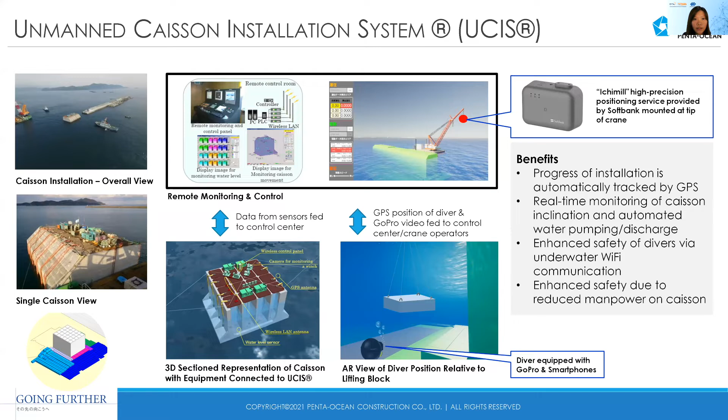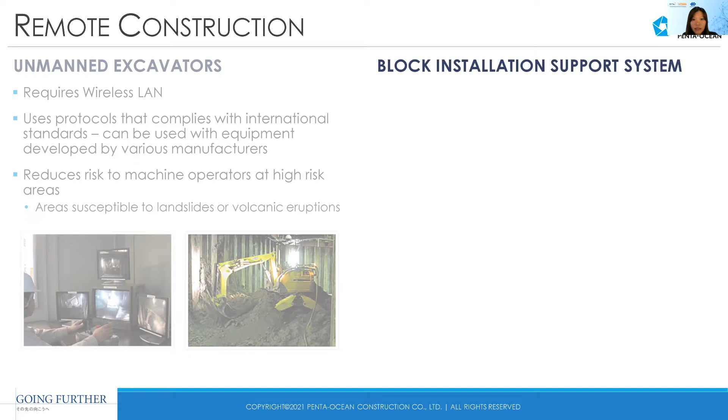Another technology that's related to remote construction or assisted construction is a block installation support system that we are using to install these X blocks for wave protection. So this system is made up of a dedicated frame, and there are various equipment mounted onto the frame, like the 4D sonar and some GNSS systems. And when these blocks are lifted underwater, this is a 4D sonar image that you see, together with a 3D modeling software that was used to model the 3D blocks.

The software will help to superimpose the actual 4D sonar image together with the 3D models that we have, and then predict or help the operators to identify the target installation position to place the X blocks. So what this does is that it helps us to reduce the time divers need to spend underwater to assist the crane operators to identify the target installation positions.

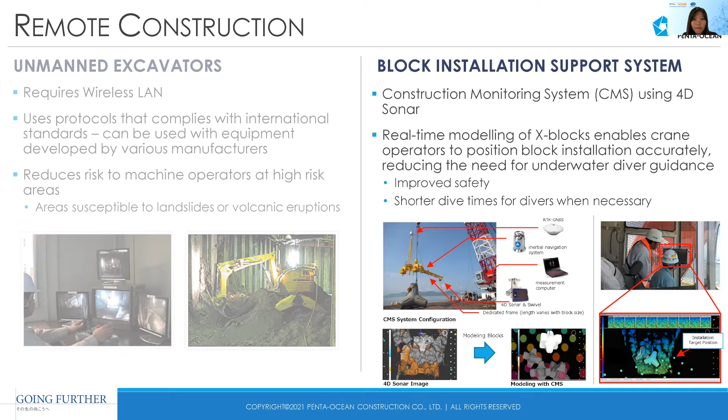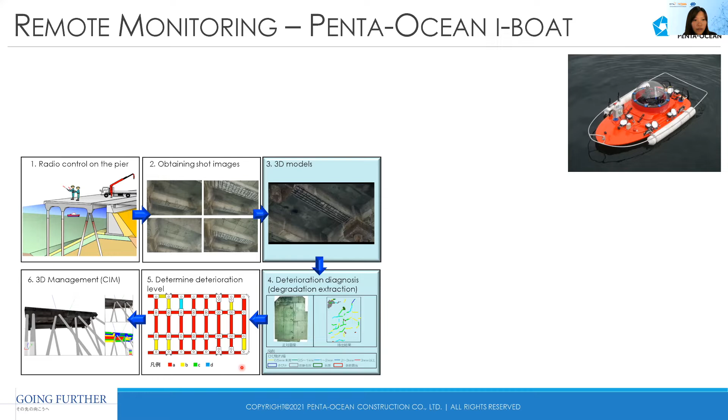So then based on these crack widths that it identifies, it automatically determines the deterioration level of each of these structures and gives a sample report like the one you see here that is colored. So this helps building assets or civil infrastructure assets people understand what is the current structure degradation of their structures.

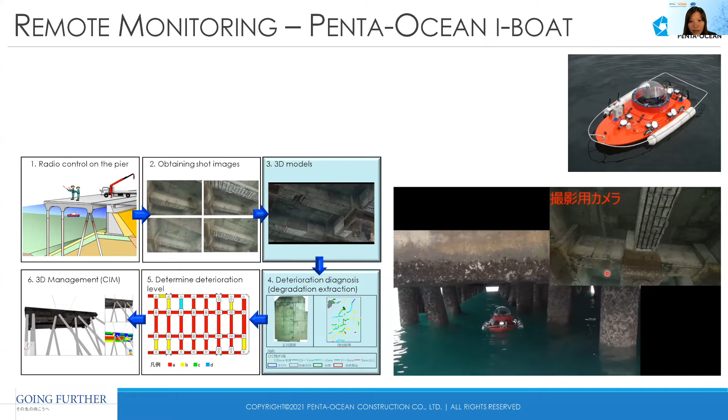So this video here, it's a boat in operation. This is the boat that is moving, remote controlled by somebody who's standing on the pier. And this is the video that the controllers are seeing. And you can clearly see how badly the structures are degraded. So apart from that, because all of this information is digitized, we can capture the information in a timeline, and then eventually we can compare how long it takes for the structure to degrade and so on.

So of course, because of the remote control capabilities and the small size of the boat, we can improve the efficiency of the inspections by about half. For a traditional inspection, we can cover about 1,240 meters square per day, but the boat can cover approximately 3,000 meters square a day of inspection.

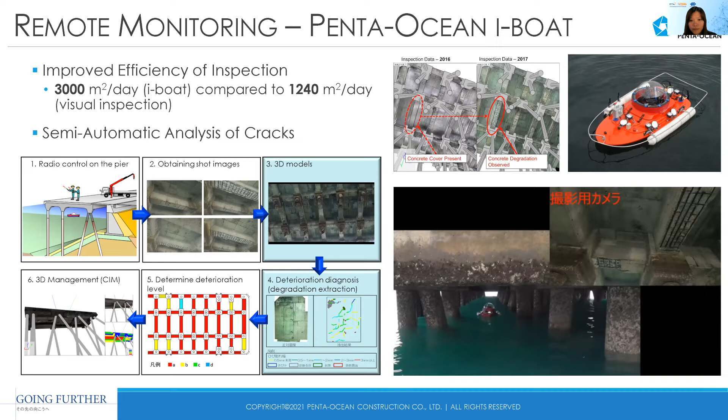And the last technology that I'll be covering is how we use AR/MR, which stands for augmented reality and mixed reality, for geotechnical visualization. So this technology is more software-based, where we call it the iPenta-Call, which stands for the Penta-Ocean Construction Information Collection and Sharing System.

So since all of this data is contained in the cloud system, people from the client's office can access this information anytime to view the data that they want to view, or people from our field office or branch offices can also see all these models in 3D in a VR environment and communicate with people in the field office who are using MR headsets

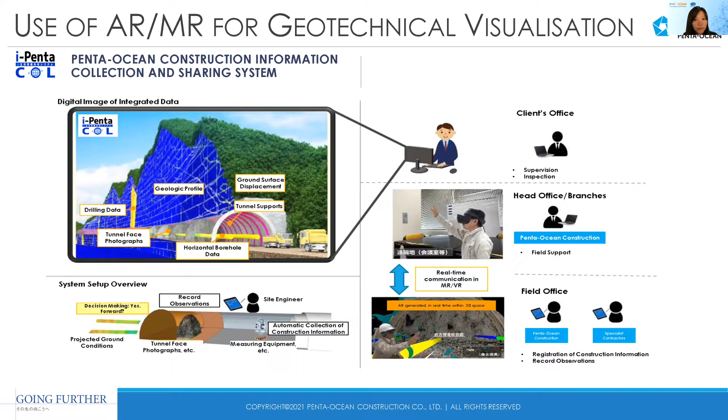And the last software technology that I will be talking about is what we call the GI-CIM, which stands for Ground Improvement Construction Information Modeling. So this is quite similar to a geotechnical visualization software. And in this video, what you see here is a combined model of BIM as well as the information from

the GI-CIM software. So the GI-CIM software is able to extract data from Excel and automatically create these grout injection tube locations and create them into a 3D model, which we can put together with BIM to identify clashes that might occur with existing utilities and such. So this kind of technology will help us to improve our construction productivity and also reduce any potential risk during our construction.

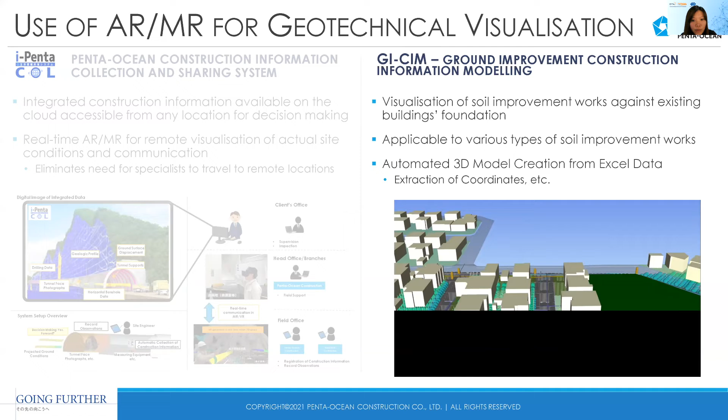So next, I will hand it over to my colleague Edward to explain to you more about how we use our databases to create detailed geotechnical models for this kind of analysis.

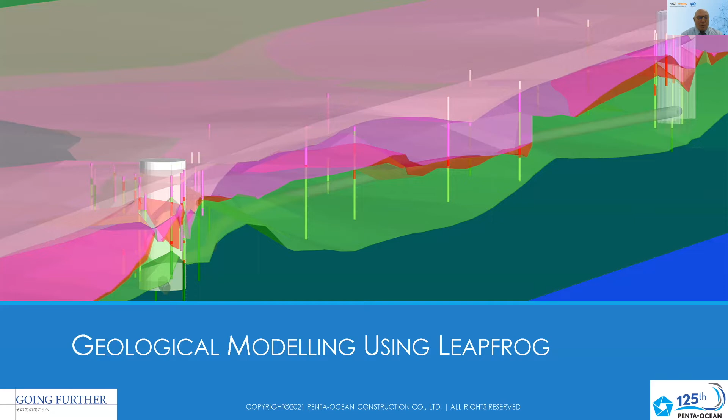Going forward in this presentation, Penta-Ocean uses Leapfrog Works to import 3D structural models from BIM to model the unique and variable geological characteristics for our projects, to convert geological borehole data into the 3D models we use, to provide realistic guidance that we can use to minimize risk and for collaborative decision-making.

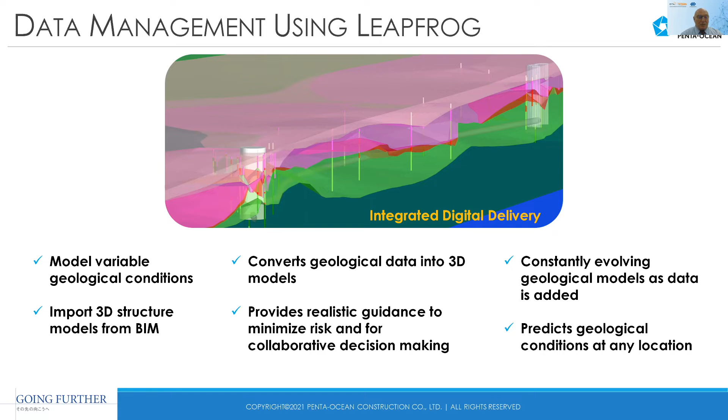To enhance the geological understanding as data files are added to the project, and to predict at any selected point of the project underground what the geological condition is expected to be. Next is a demonstration of modeling the rock head and soil profile.

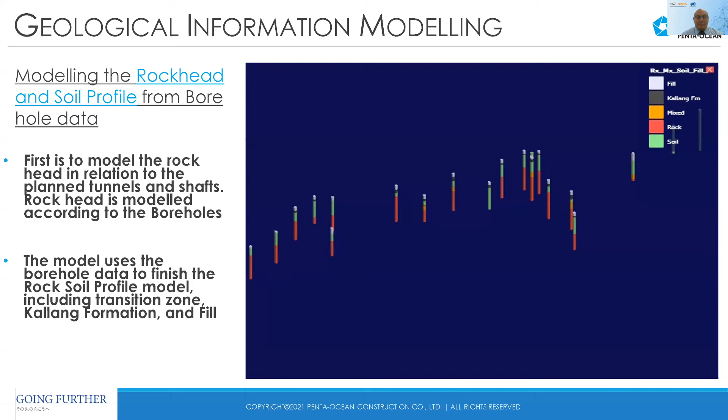To model the rock head in relation to the planned tunnels and shafts from the borehole logs, we import the borehole data. We start with a select group of boreholes. The geological data from the boreholes is categorically separated into rock, soil, mixed, Kallang, or fill. The rock contact layer is drawn, as you see here, and it's overlain by the mixed zone.

In the orange, and then by the soil zone, the green. Then the Kallang Formation extents are added, overlain by the fill layer. Then the shafts and tunnels are brought into the 3D model. And now we can see from any vantage point where that rock head will occur in the tunnels and the shafts.

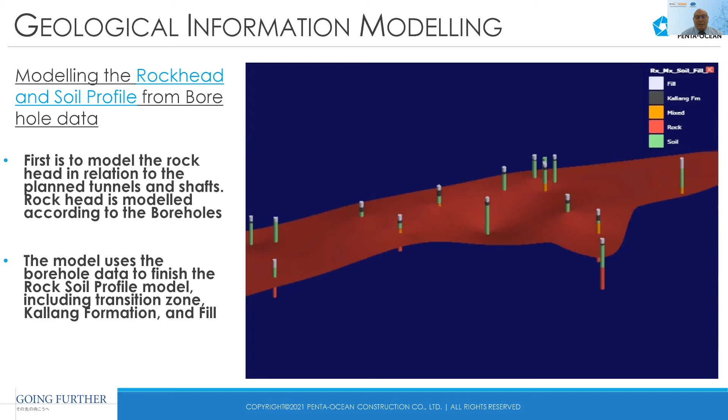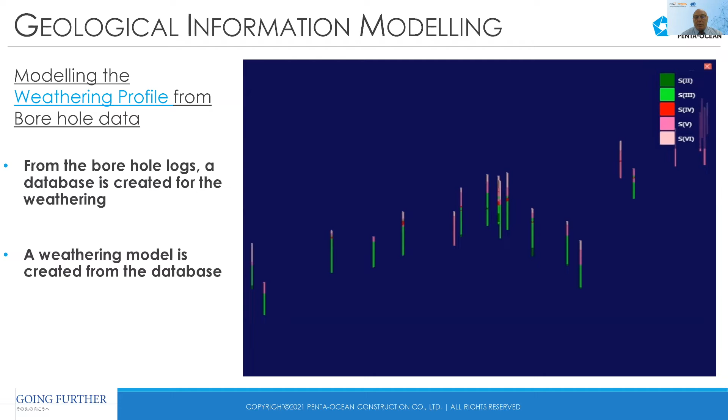Similarly, this is a demonstration of modeling the project weathering profile from the borehole data. First, we show only the S2 intercepts, and then we've just added the S3 intercepts. The red are the S4, the pink are the S5, and the light pink are the S6 profiles. Now we turn on the S2 solid, the S3 solid, the S4 solid, the S5, and the S6, and then add the tunnel and shaft locations.

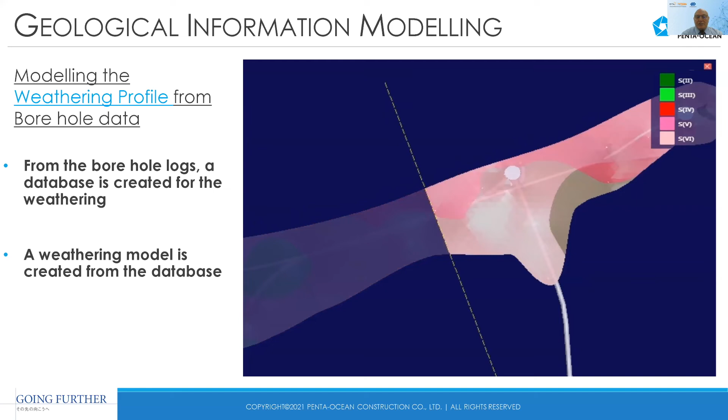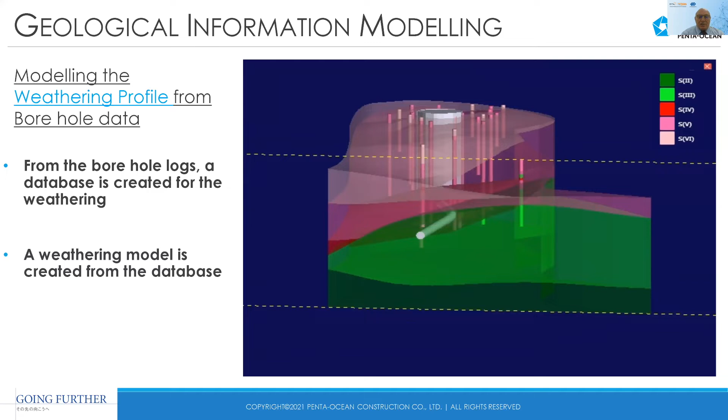We look down, we can make a slice section and rotate that section. And now we can see using transparency into the project, and we can move those slices to any location we want to have a better idea of what the conditions will be. Now we are making a longitudinal section, once again rotating.

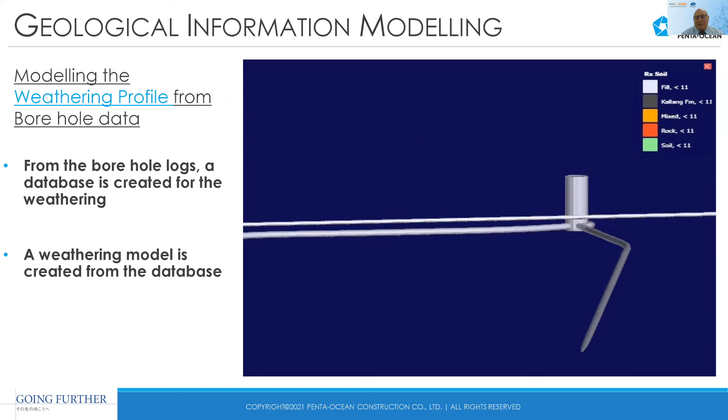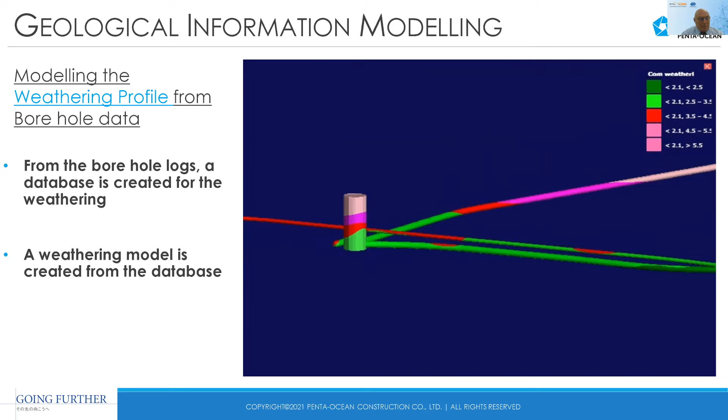And here we've combined the geological model with the tunnels and shafts. And so we've actually said, what do we think the conditions will be as we excavate the tunnels and shafts at what location? This is combined weathering, and it's great for visualization and planning.

Excavation volumes are useful to know and plan for in advance for the tunnels and shafts, because differing grades of material have to be dumped at differing locations. And each location has a difference in transportation costs and dumping costs. So knowing this in advance is a great help for planning.

Now we're going to look at TBM rings, which we plan and model into the Leapfrog models. Every ring has a planned location with an XYZ coordinate and a number. So we can plot these into the model. Then rock characteristics are cataloged as the TBM excavates that particular ring. Tunnel face records can be used to model geology because they're close spaced in relation to wide spaced boreholes.

Incorporating ring locations into the model provides a real-time understanding of the TBM cutter head location and the rock characteristics found at that location. By knowing the location for each ring, a prediction about the rock type, weathering, permeability, rock strength, abrasivity can be made and compared to the actual ground conditions. This is called ground truth.

These comparisons are valuable functions for planned and unplanned cutter head intervention locations, because some interventions, as you know, can take days to complete. Project schedules can be improved when cutter head intervention locations can be planned to the optimal locations.

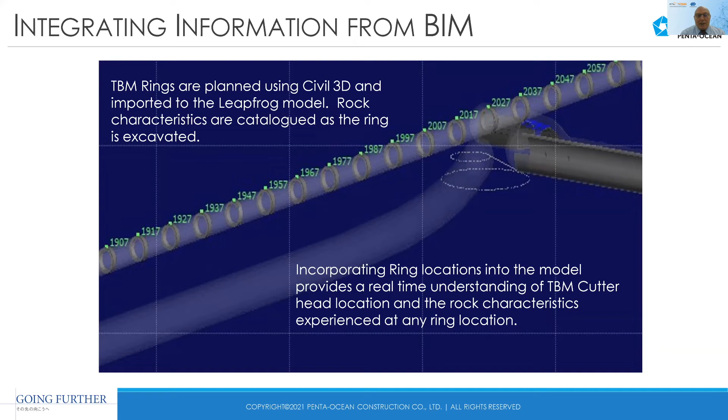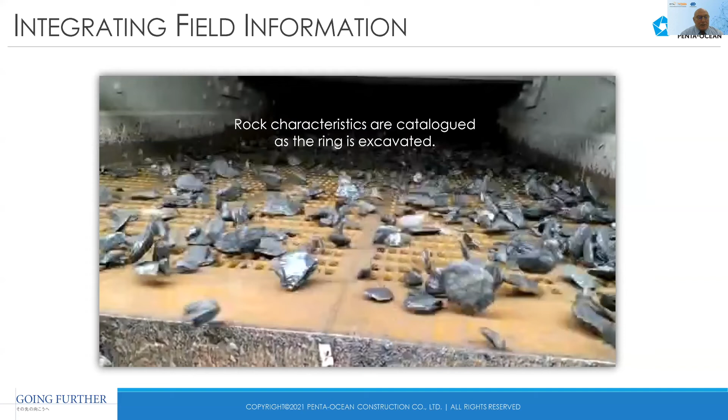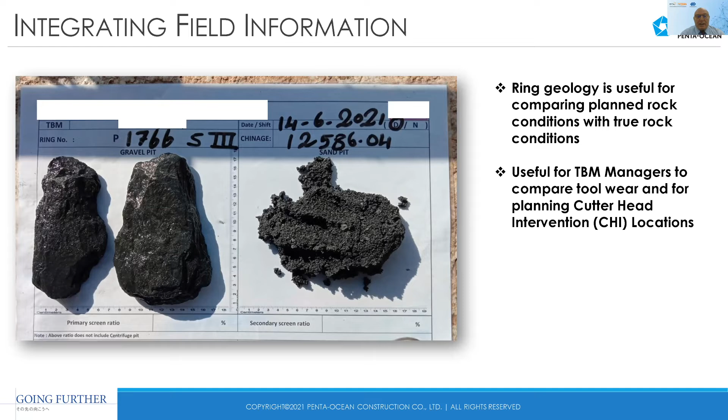This next slide is a video that we take of boring machine rock cuttings passing over a separation screen headed for the slurry treatment plant. We take these at every ring, and this video specific ring number is cataloged into our database for future reference. And here's a photo of the fine and rock material grab samples collected at the same ring number. Again, these are cataloged and kept in our database.

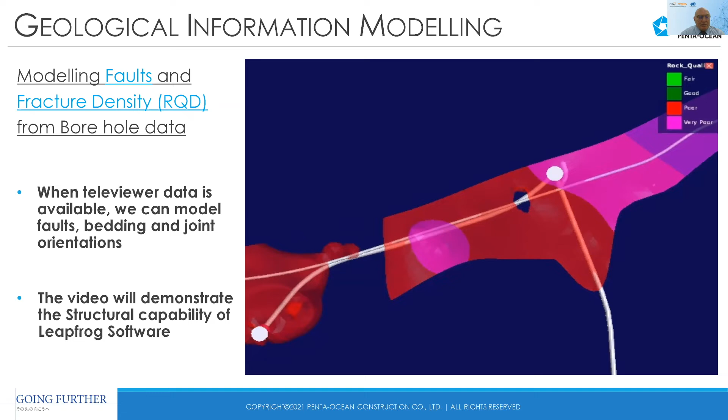This next video shows how faults and fracture density, or RQD, from borehole data can be modeled. When televiewer data is available, we can model faults, bedding, and joint orientations. We start here with a plan view for numeric modeling of fracture density, or RQD. The red is poor, the pink is very poor, the green is fair to good. So we focus on the pink and the red areas. We know the rock is highly fractured. So this helps to identify suspected fault zones.

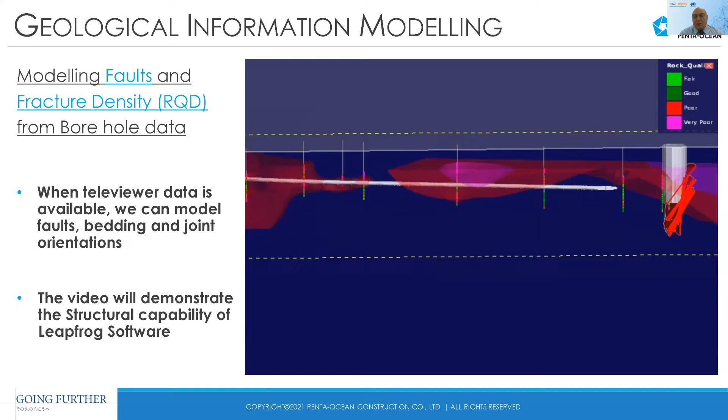Now we can put in additional boreholes using a televiewer survey. And if we find, we can identify the strike and the dip of these fault zones. So there we make a longitudinal section, which we can rotate. We can project the fault zones outward from the boreholes, which helps us to anticipate ground stability and support requirements.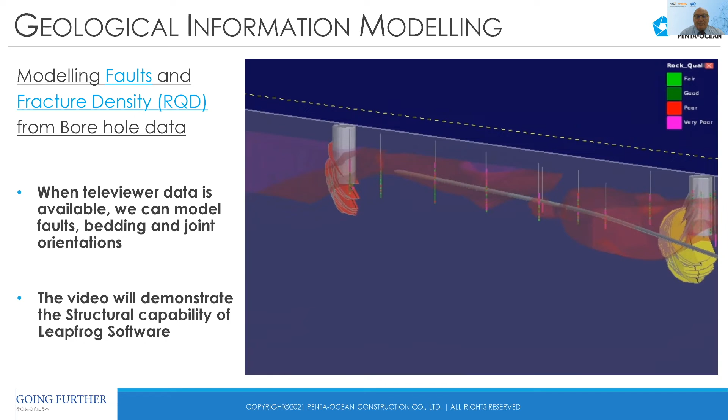Some additional things we're doing with Leapfrog Works for geological modeling: soil penetration, SPT tests, total core recovery, solid core recovery, rock strength, permeability, rock abrasivity, plasticity, ground improvement and ground injection locations and quantities, and virtually any data that can be numeric or categoric can be modeled, and most of this data can be modeled in combination.

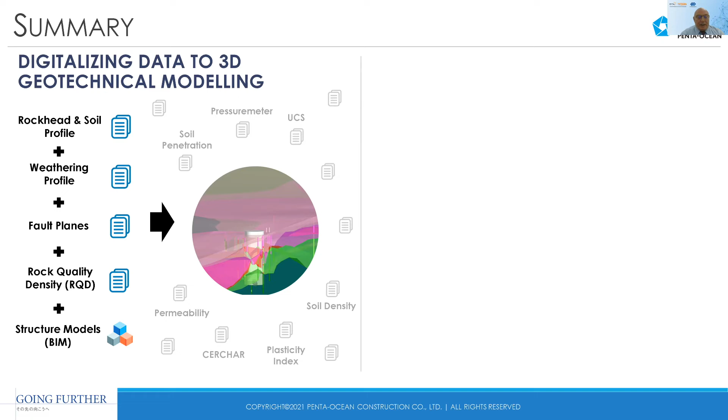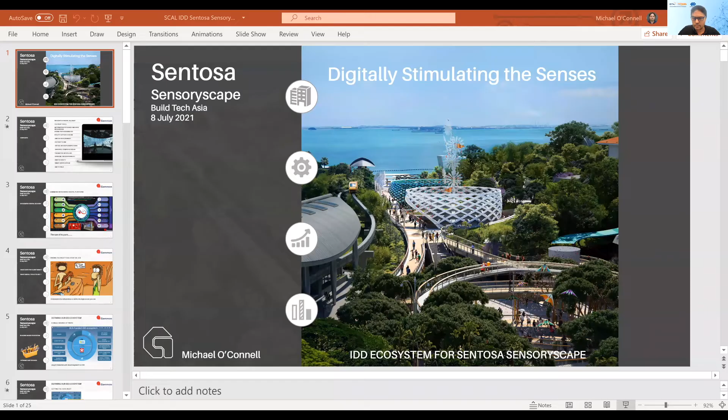Okay, I'll just pause for a moment.

I think what I'm trying to do today in the presentation is to show you some real use case examples of some of the digital technologies that we deploy at Gammon. This cover page is a view of the project that we're doing. It's a very unique, bespoke project with some extremely challenging structures.

You can see these three two-way curve vessels, which are the key attraction points on this new development, two steel vessels and a precast concrete vessel. Later on in the presentation, I'll share with you some of the challenges of those to develop from a conceptual model into a fabrication model and prefabricated components.

This slide is Gammon. Gammon, for the last 2 years, we've been slowly building up our capabilities on digital technologies. We've now developed an integrated digital platform. At the core of that, obviously, is a common data environment, the CDE, and all the other technologies that you can see along the perimeter actually will input the data into that single source of truth, that CDE. So this is our corporate template in terms of different technologies.

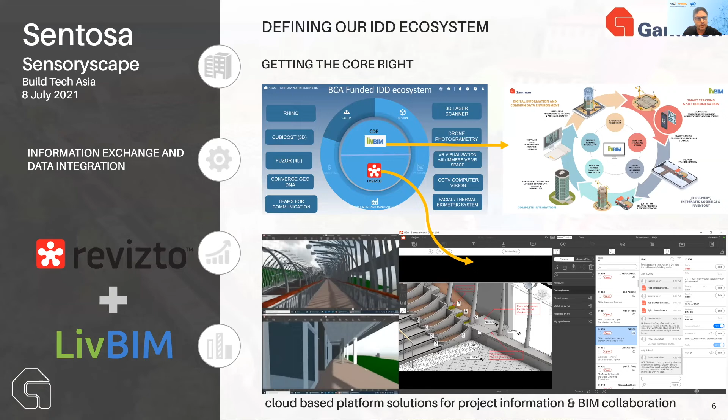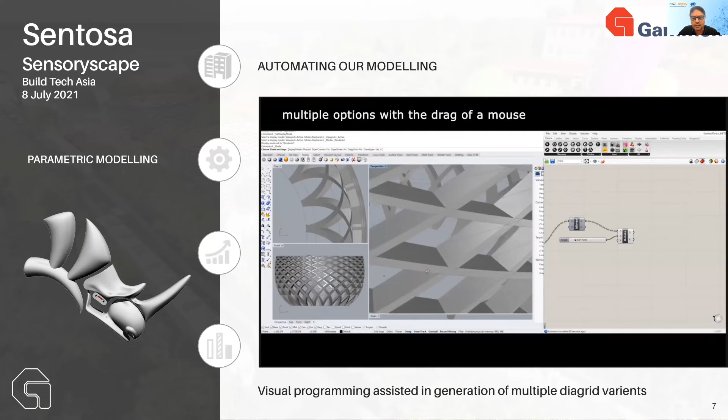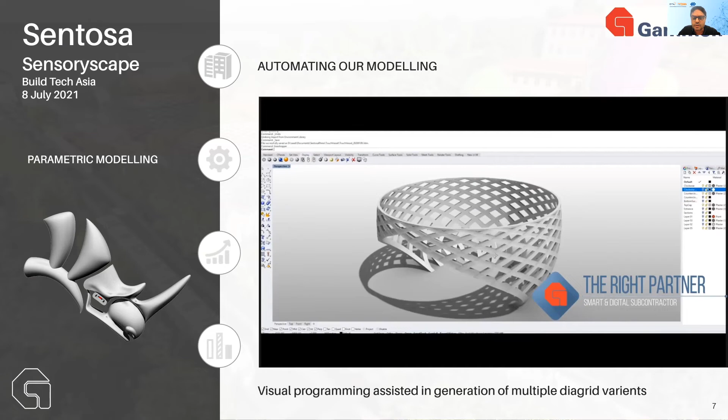Parametric modeling. We decided at the beginning of this project, with the complex two-way curve geometries that were involved in these vessels, we needed some assistance with a software. So we selected Rhino. The benefit of Rhino is you can automate multiple diagrid variants when generating the form of the vessel. And it gives productivity savings in terms of BIM resource time, an automated number of different options that you can present to the client and the consultant to get it resolved.

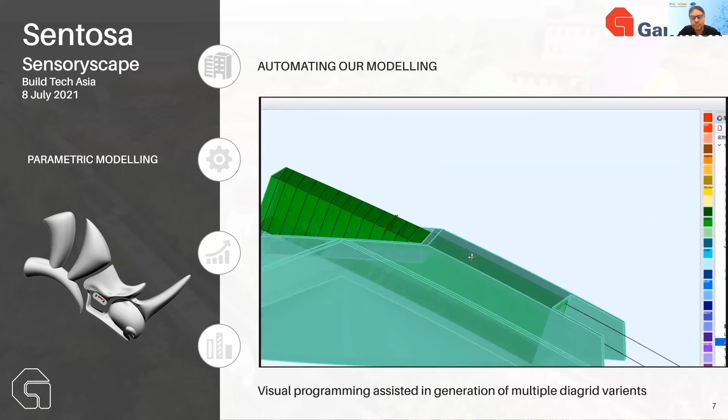So this is a capability we developed in-house, and we were careful to select our subcontractors and vendors that had similar in-house capabilities. The importance of that I will share with you later.

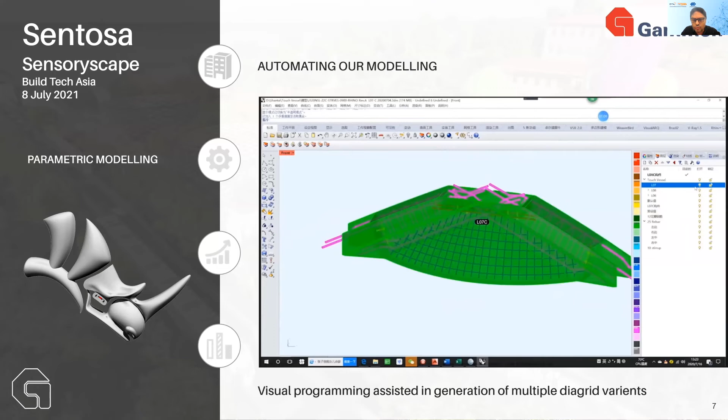So this is actually what you can see on the screen. This is for one of the precast vessels. Even the rebar was modeled parametrically to conform within the volumes of the precast shapes. Very, very complex. Without Rhino, I think it would have been unable to develop. And of course, your fabrication drawings that come out of the back.

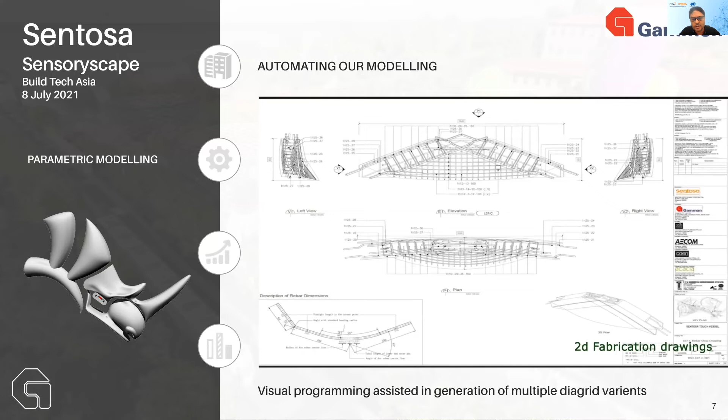So this is the Garden of Smell. It's one of the steel vessels. Again, 75% of this project has been prefabricated. So the importance of developing a workflow from the design model through to the construction model, and in the end, eventually to the fabrication model, was key.

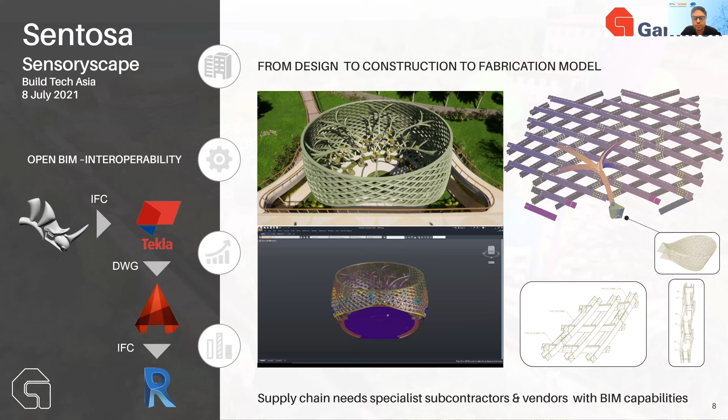Again, this is the Garden of Sound, which is the other steel vessel. Essentially water bowls running up the whole length of the vessel with cascading water down, which generates the sound. So another one of the sensory vessels. We also worked together with our steel specialist, who developed the fabrication drawings in Tekla, and then those were exported out into the drawings for fabrication in the factory. So again, it's very important to find the right supply chain partners and vendors that have those in-house capabilities.

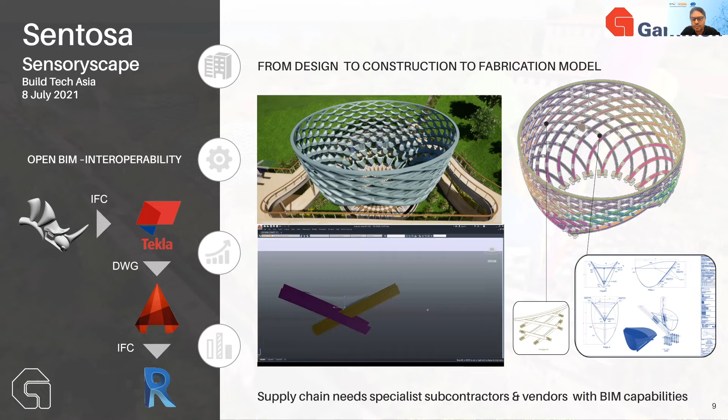And the final vessel we share, this one is the precast vessel, probably the most challenging of all, certainly in terms of the connections and the joint details that went into developing this vessel. These vessels are about 13 meters high by 23 meters wide, so they're very, very challenging structures. And I think without the technologies or the software that we used, I don't think we'd have been able to deliver a project like this. So it's digital transfer of files all the way through the chain, from the consultant to the contractor to the specialist vendor to the factory fabricator and back to the main contractor to put in for our as-built model.

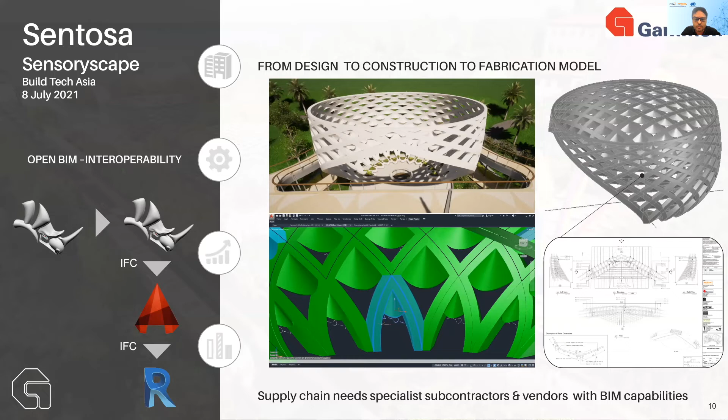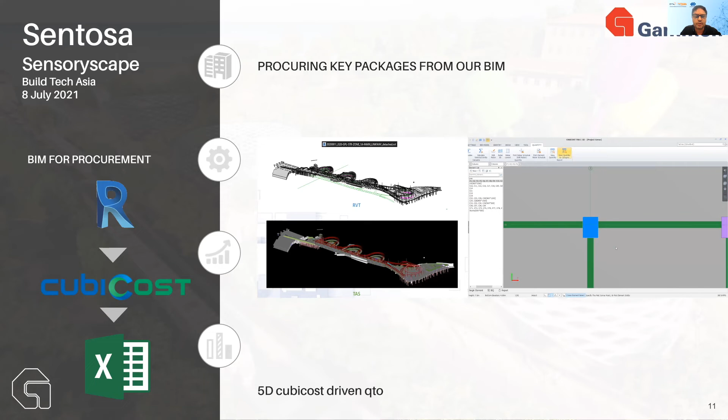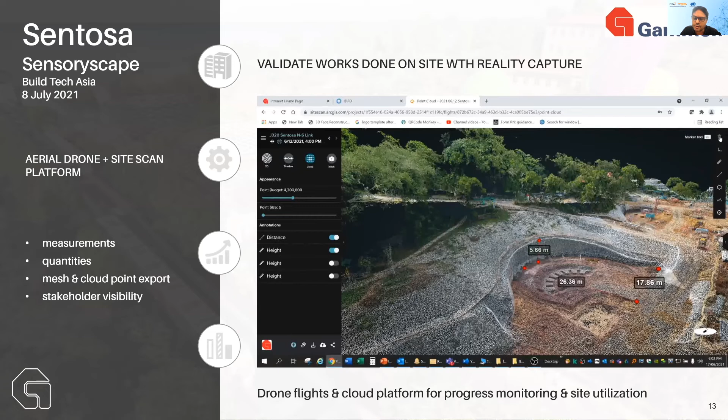This is a view of the output that you get. Obviously, the platform here stitches together thousands of photos taken during the flight. It can generate this as a point cloud model for you or a textured mesh model. What are the benefits of this? Well, you can go into this model. It's within 20 to 40 millimeters tolerance of what's actually on site. You don't have the same level of detail you get with laser scanning, but it's very informative in terms of planning your site, utilization, plant and equipment, where you can come in. And I'll also show you another use case for this information when we export it out, how we can use it to facilitate real-time progress monitoring. So the key is stakeholder visibility, and we can also use this data to support our progress claims with the client.

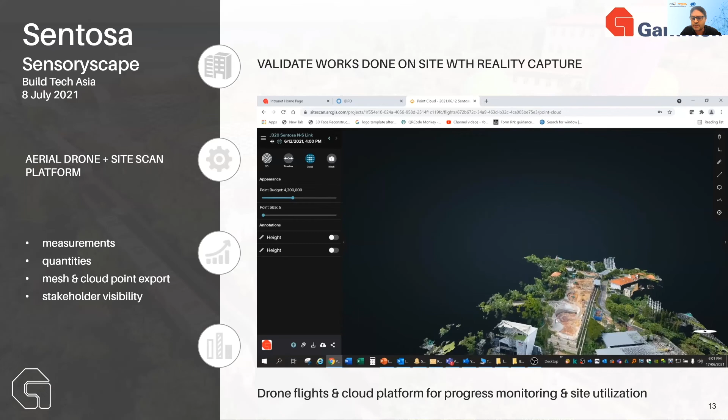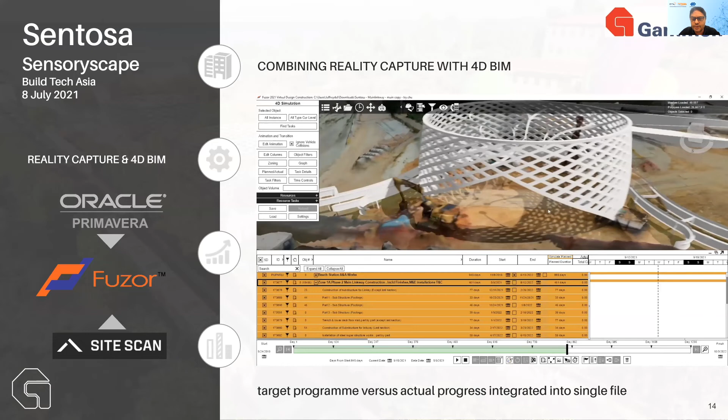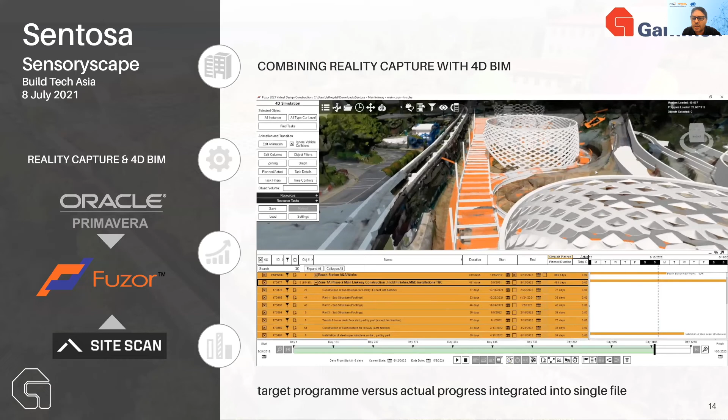But now what we've looked at is actually integrating the textured mesh model that we've got from the drone flight. We're able to incorporate this into the overall model, and we're able to see on that target date where we're supposed to be, say, casting our footing or our slab to the vessels, whether we've excavated down to the correct level or not. So this is going to be a very powerful tool for us moving forward in terms of monitoring the site readiness for the next task to come in, or in terms of actual progress as well. So this is something we've not used before, but I think we're all getting quite excited about being able to do this integration.

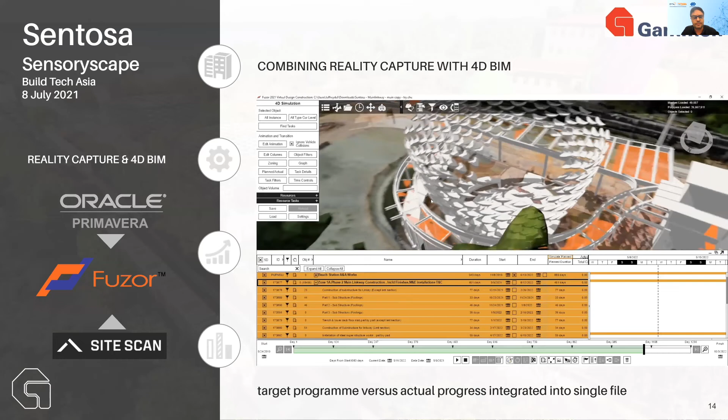Now, with 75% of DFMA on this project, that's an awful lot of prefabricated components that are going to be done off-site. It's going to be key because the steel is being prefabricated in Malaysia. The precast components are being cast in China. So there's a real risk for us in terms of certainty of those prefabricated components.

How do they fit? How will they be assembled together when they come to Singapore? How do we check the quality control? How do we validate the geometry of these prefabricated components? So we're implementing 3D laser scanning technology.

The laser scanning will be done in the factory. The data will be sent to us. We will process that point cloud data, and we will bring it into the BIM model to check on the alignment, the tolerance, and geometry of each of these prefabricated components.

Only when we're satisfied that this meets the criteria and the tolerances inside the model will we release the prefabricated components from the factory for delivery. So it's actually a technology that replaces the use of manpower going to visit the factory to validate that the components are ready to be shipped.

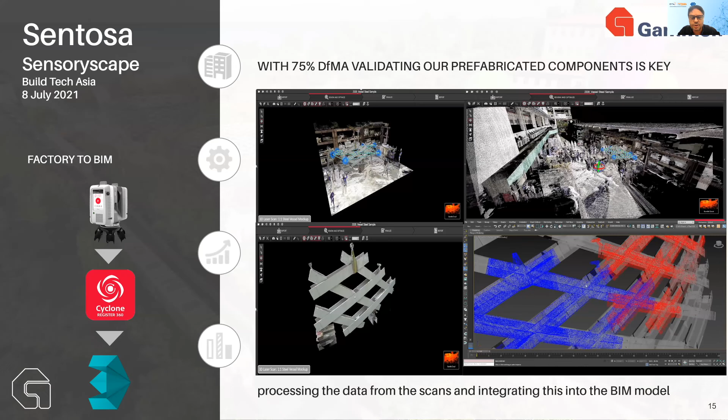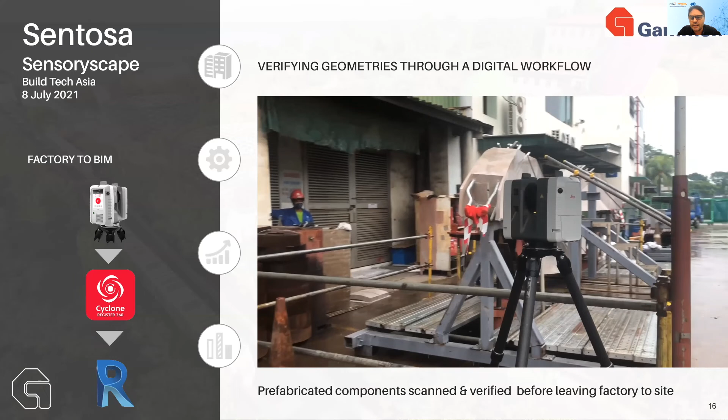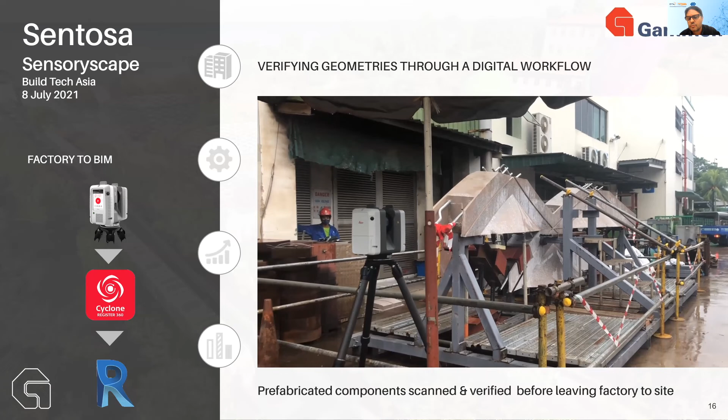Another example, these are 3 precast segments that have been assembled in a factory. Again, we need to check how this compares to the fabrication model, the BIM model that was developed. Have they been cast correctly once the formwork is out? Will they conform to the 3D geometry when these were assembled?

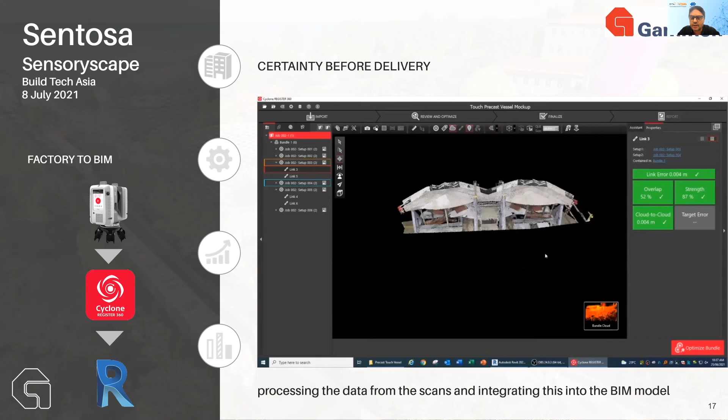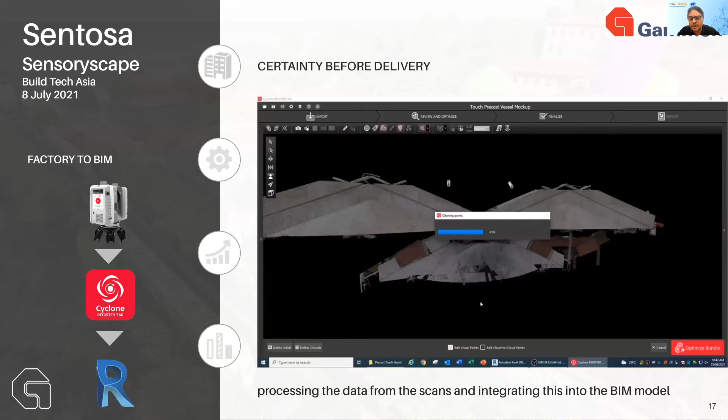So I've shown you this. This is basically what is generated. This is the data we get, the point cloud data from the scan. Obviously, there's a lot of things inside the scan that we don't need. So you first go through the process of cleaning up the point cloud information that's not required, essentially just cutting in and around your precast component, cleaning it up so that it's ready to then import into your model.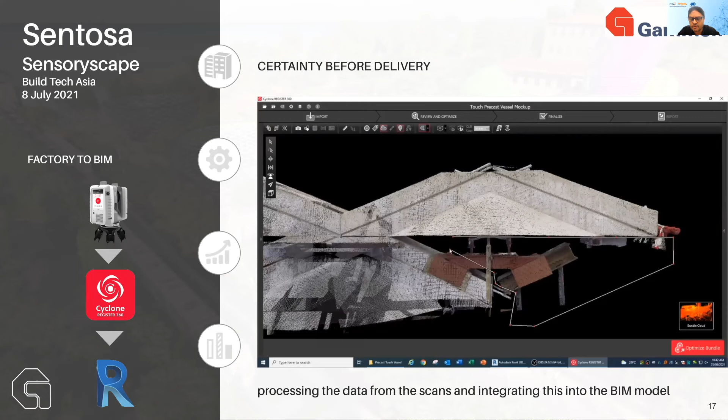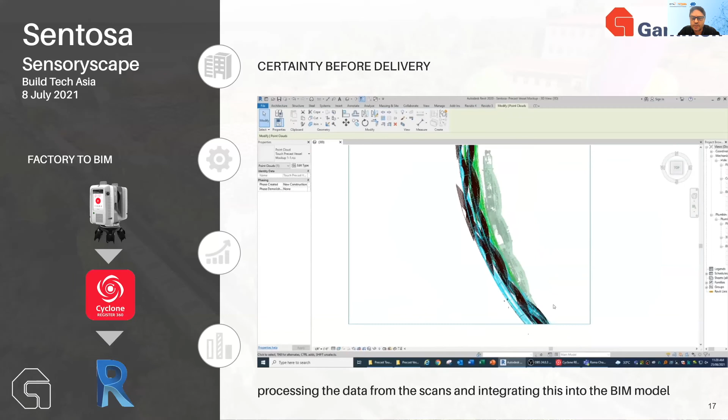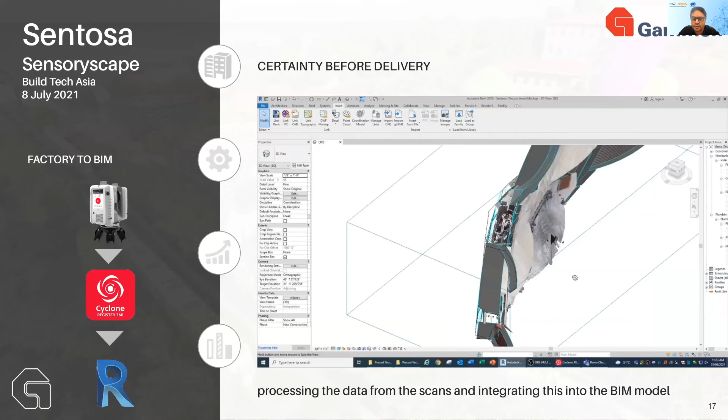So you see this one is just tidying up, clearing out everything that's not related to the precast model. And then you bring it into the Revit file and you check the alignment of that precast component to make sure it's conforming to the shape. This gives you certainty when the prefabricated unit is sent, you've got confidence that they're all in the right geometry and there should be no issues during installation.

Immersive BIM, the VR immersive environment. We've used it in a number of ways on Sentosa, certainly during the COVID restrictions, trying to recreate the bubbles between head office and site teams to keep them segregated.

We've been able to use a BIMATRIX software that allows multiple users from multiple locations to be inside the same space in the same model at the same time, collaborate, comment, do markups virtually. And this is something that's actually helped us during the COVID period where we weren't able to visit site, where there were shutdowns. So very good use of this technology.

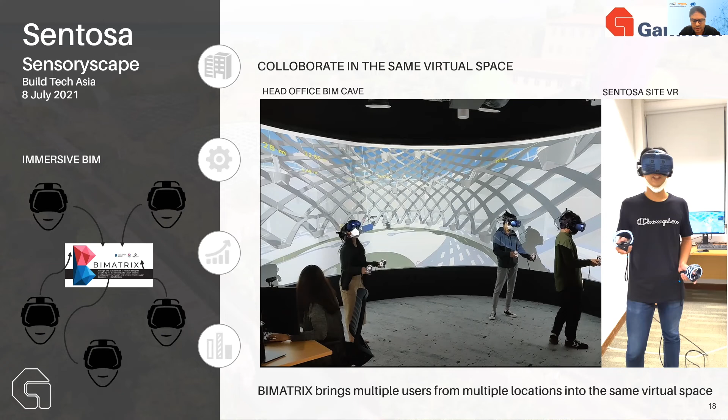Some people may ask about the investment that goes into bringing these technologies to our project, to our site. I think we're already starting to see some return on that investment. We're doing virtual mock-ups and inspections of the design. They're rendered photorealistic, with the actual paint colors applied. This is the steel vessel you're looking at.

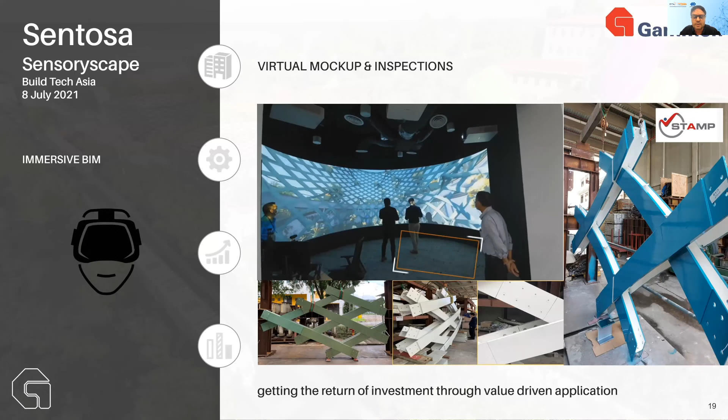Originally in the contract, we had 2 different tones on the steel vessel, but by bringing the architect into this immersive space, walking around his project, seeing it with a single tone color, we were able to convince him to make the design change, which obviously saved us a lot of time in terms of the protection we would have had to do to that vessel on site. So these are some of the tangible benefits that start coming back for the company.

Sensors, just a very quick one. We are using sensor technology. In the precast vessel, if you see in the middle there, we will be casting into the joints a GeoDNA sensor that will transmit data on any tilt or movement within that precast structure as it's constructed and assembled.

The good thing about this is that for 3 to 4 years after the completion of the project, we'll continue to get data from those sensors, which will inform us whether there's any movement in that structure during or after completion.

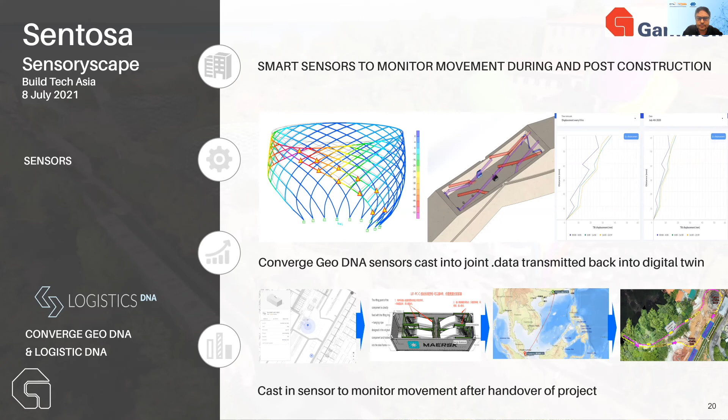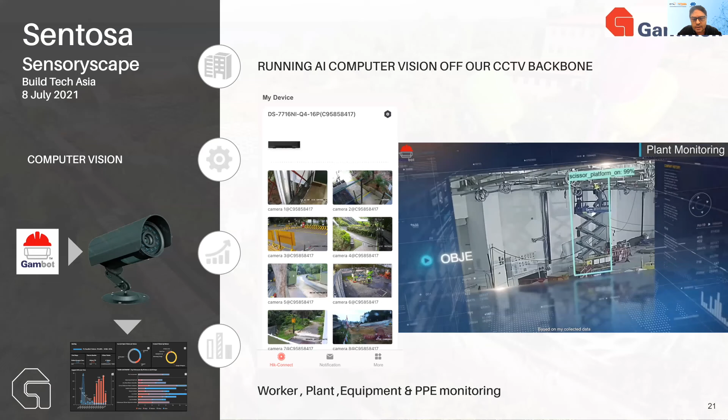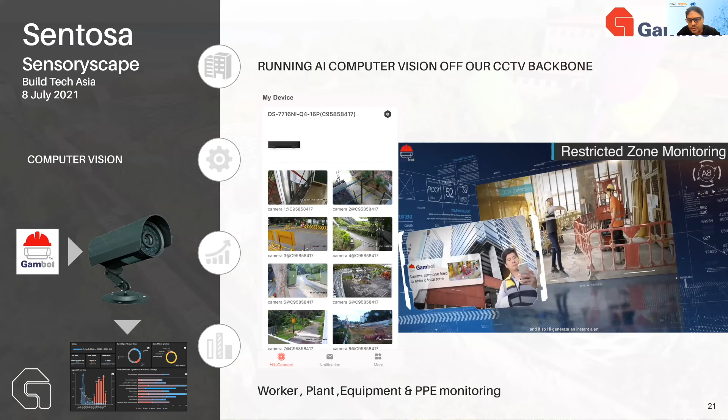I mentioned earlier computer vision. Gammon have got their own app developed, which is riding off the back of the CCTV cameras. We've got 13 cameras on site. We're able to track our workers. We're able to monitor our plant and equipment, restricted zone for safety management, and even down to using the AI algorithms to detect whether workers are wearing their PPE. And maybe even extend it to doing safe distancing between workers.